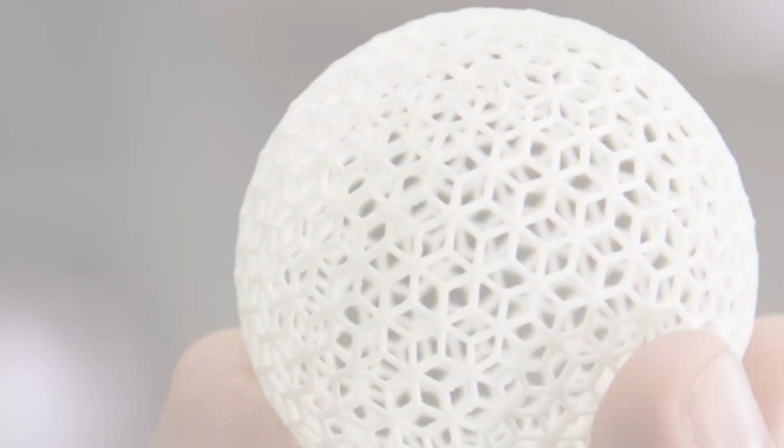It's 2020, an awaited year which was predicted as a revolutionary year. Indeed, it has happened so. In this pandemic situation of COVID-19, a technology which has emerged as a boon for mankind is 3D printing. In Italy, this technology came into rescue for hospitals when valves to reanimate medical devices were not available and traditional manufacturing ways were shut. Worldwide, an informal network of hobbyists and manufacturing firms are using 3D printers to make tens and thousands of T-pipes, face masks, shields, ventilators, and lots of other medical equipment and products which were needed but unavailable in market.

3D printing is definitely the future's technology and an essential part of Industry 4.0. Industry 4.0 is the fourth industrial revolution.

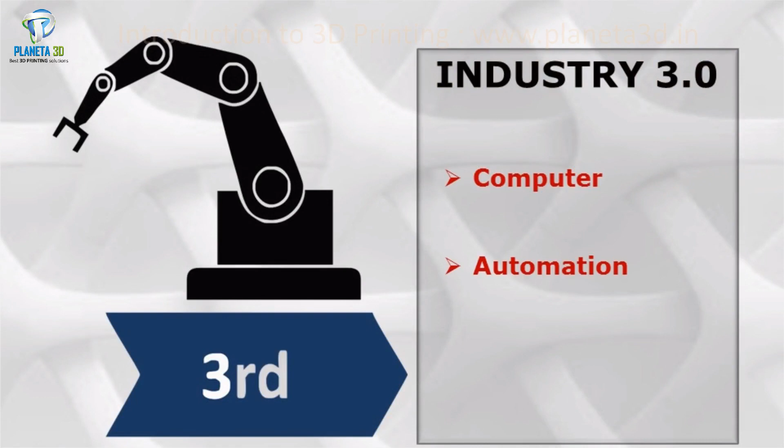What it is and why you should care: the fourth industrial revolution is the fourth time human beings started using advanced technology to solve problems. Humans first started using mechanism, water power, and steam power. Then secondly came mass production, assembly line, and electricity. Third was computer and automation. And fourth is 3D printing and cyber physical systems.

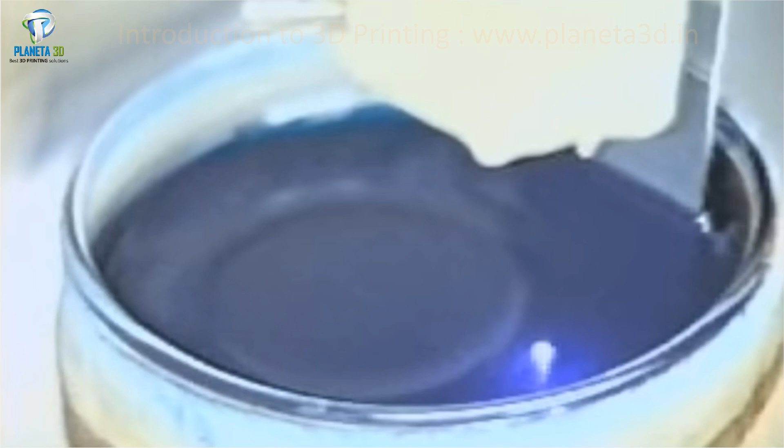People often wonder, are 3D printers too difficult to handle and operate? Well, in its time of origin, this technology did need only highly trained professionals to operate, because 3D printers were initially designed specifically for engineers, architects, surveyors, or other technical professions. Earlier, 3D printing technology seemed to be some science fiction that was difficult to understand and even more difficult to perform. But exploring its vast utility in every big and small field, towards the 21st century, experts have successfully made 3D printing a lot more simple, user-friendly, and easy to access.

3D printers are now available for common consumers at ease and at affordable price too. In this introductory course, I am sharing some basic information about this revolutionary technology which will definitely make you capable enough to get started with 3D printing.

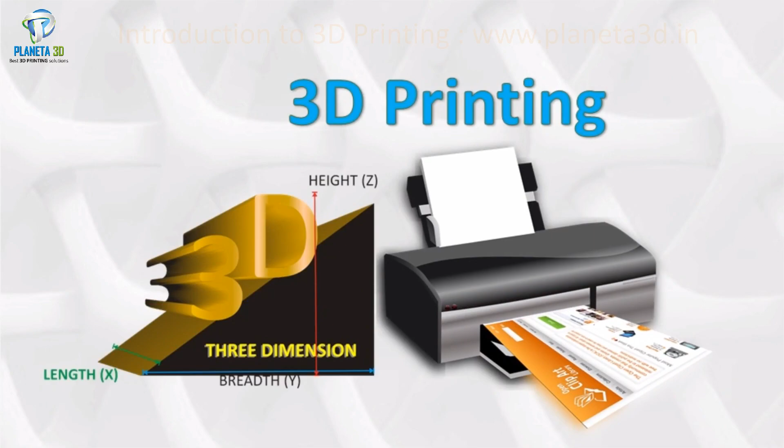Now what's printing? Printing is a process for reproducing text and images using a desired color, ink or any material using a machine. The printers used in offices and homes are 2D printers, two-dimensional, that is length and width. Now, combining both the concepts of 3D and printing, this new term 3D printing came into existence. First a CAD file is designed and then the print command is given to the machine. So this machine is called a printer that prints in 3 dimensions, and the process is called 3D printing.

Magic! This process is also known as the additive manufacturing process.

Earlier, products were manufactured either by subtractive manufacturing process or formative manufacturing process. Formative manufacturing typically forms material into desired shape through heat and pressure. The raw material used can be melted down and extruded under pressure into a mold, known as injection molding or die casting, or pressed and pulled into the desired shape, called stamping, vacuum forming, and forging. The design of formative tooling is also complex, with the need for mold features like sprues or runners to assist in the formation of parts. Parts produced through formative manufacturing also have design constraints like draft angles and uniform wall thickness to aid in the forming process.

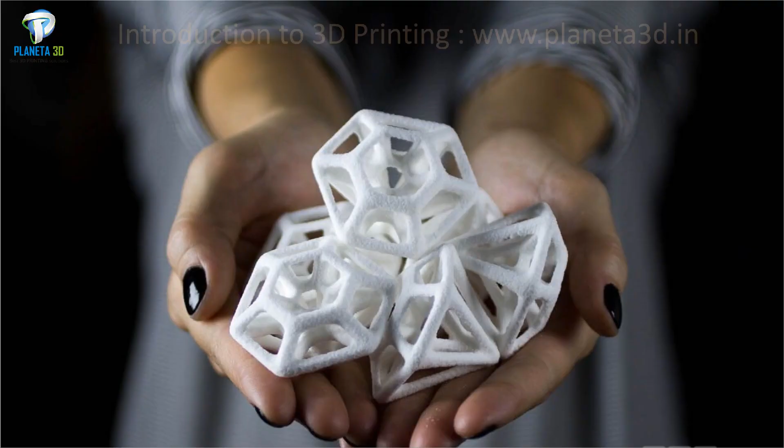Subtractive manufacturing typically forms material into desired shape via punching or CNC. In this process, from a block of material, the unwanted material is removed to obtain the shape of the desired object. Subtractive manufacturing is almost a wasteful production process, as a large amount of material is often removed to produce the final part, leaving a lot of waste. The biggest hurdle is that complex geometrical shapes are not at all possible.

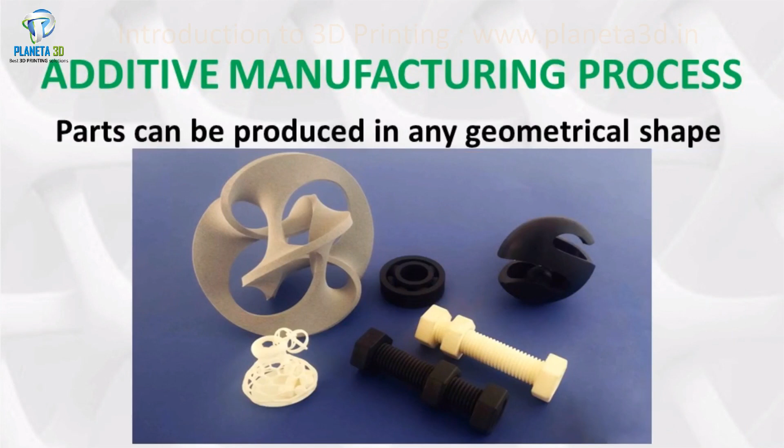All these hurdles in production make additive manufacturing technology very appealing to the industry, because it has potential to be precise, cost-effective and time-saving in terms of production. In additive manufacturing, layer by layer is added; each layer is cooled and combines with the lower layer to form the material into the desired shape. Instead of carving out shape from a large chunk of material, which is quite wasteful, production of 3D objects using a 3D printer could mean using just the required material to make a product. This mode of production is the method of creating an object from a digital design, so parts can be produced in almost any geometry, which is one of the core strengths of additive manufacturing.

3D printing does not rely on expensive tooling, with essentially low startup cost, and the biggest advantage includes rapid verification, development of prototypes, and even production of functional parts for end use. And that's not all. The most interesting part is that additive manufacturing can also be used to make mold, die, and punch, which are used in formative and subtractive manufacturing. Wow! I just love 3D printing technology.

Applications of 3D printing. 3D printing will disrupt every field it touches. In recent years, 3D printing technology has developed significantly and can now perform crucial roles in many mainstream applications.

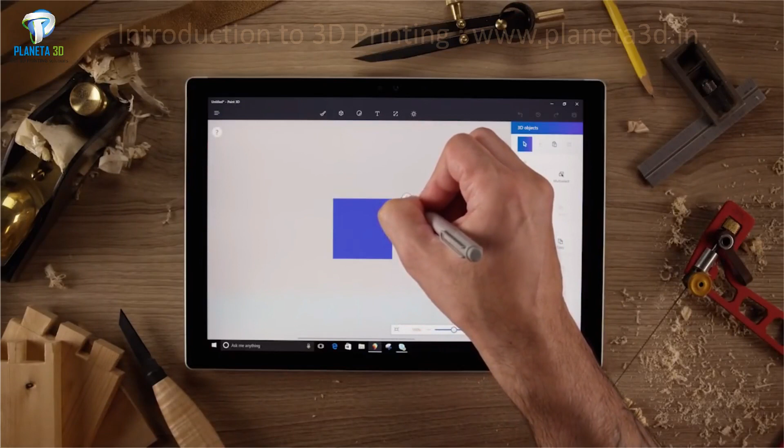There's a lot you can do with the primitive 3D shapes in Paint 3D, like this cube. Use the top rotation tool to adjust the angle of your object. The rotation tool on the right can be used to tip your model back and forth. Use the orbit tool on the bottom to spin your model around, and use the last tool on the left to move your model back and forth in space. Grab any edge of your selection and pull it in or out to adjust the depth of your shape. It's easy to use the adjustment tools in Paint 3D to turn basic shapes into something totally new.

Let's also have a demonstration of 3D modeling with Tinkercad.

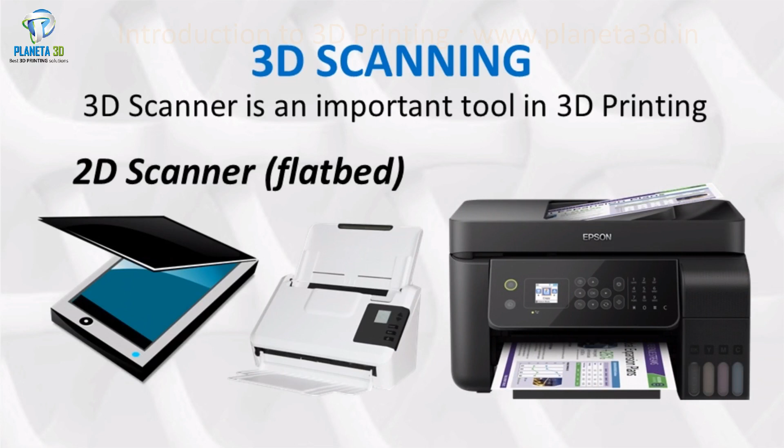3D scanning. 3D scanner is another important tool in 3D printing. For more understanding, let's compare it with a flatbed scanner, which is commonly used to scan documents and images. Scanned files can be used as a digital reference and preserved. Also, it can be used to make multiple copies from it. Scanned files are also very easy to send via internet or storage devices to others. In the same way, 3D scanner solves the purpose. It stores 3D properties of the scanned object that can be used when needed.

How does a 3D scanner work? Switch on and hold it. Move the scanner around the object. Save the digital replica file. Do some corrections or editing if needed and give the print command. The 3D printer does the rest. Let's see a demo of a beginner's level 3D scanner made by XYZ.

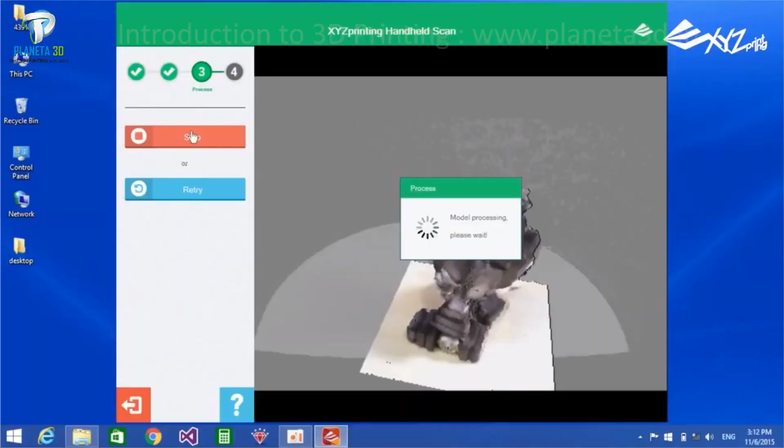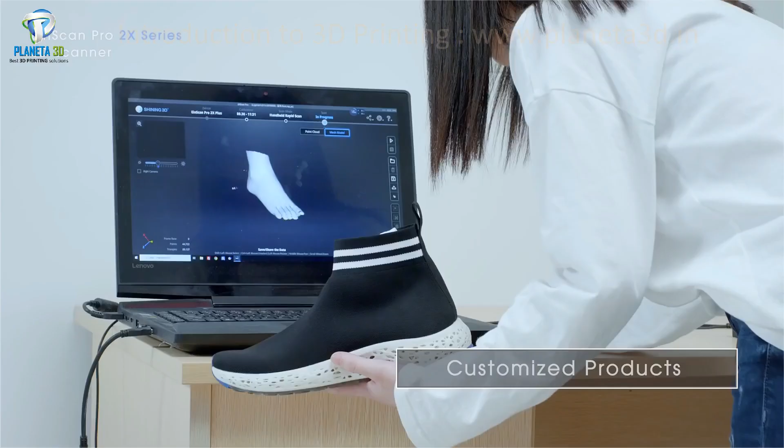There are different high-range 3D scanners for terrestrial scanning, for surveyors, and big turnkey projects.

STL and slicing. In order to 3D print a product, a CAD model must be converted into a format that a 3D printer is able to interpret. This begins by converting the CAD model into a stereolithography, that is STL file, also referred to as Standard Triangle Language File. OBJ or 3MF file formats are also compatible but are less frequently used. STL uses triangles, that is polygons, to describe the surface of an object, essentially simplifying the often complex CAD model. Most CAD programs are capable of exporting a model as an STL file.

Once an STL file has been generated, the file is then imported into a slicer program, which slices the design into horizontal layers that will be used to build up the object. The slicer program takes the STL file forward and converts it into a G-code. G-code is a numerical control programming language used in CAM to control automated machines like CNC machines and 3D printers.

The slicer program also allows the operator to define the 3D printer build parameters by specifying support location, layer height, and part orientation. The slicer programs are often proprietary to each brand of 3D printer, although there are some universal slicer programs like Cura, Netfabb, Simplify 3D, Slicer, etc.

If you are a designer, you only need to provide the 3D printer operator with an STL file. The operator will then set the desired parameters for the print and produce the G-code file themselves.

Types of 3D printing processes. In 2015, to standardize and define different methods of 3D printing, the ISO ASTM 52900 standard was formed. Seven types of 3D printing processes were categorized, which are as follows: material extrusion, vat polymerization, powder bed fusion, material jetting, binder jetting, direct energy deposition, sheet lamination.

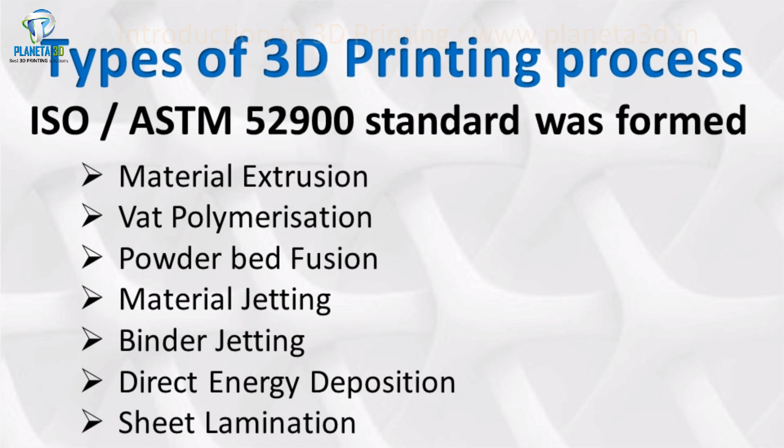Let's discuss these technologies associated with the processes and also description of the processes.

Material extrusion process: here, material is selectively extruded through the nozzle or an orifice. Fused filament fabrication (FFF) technology, commonly also known as fused deposition modeling (FDM), operates under this process. FDM is a term trademarked by Stratasys. This technology is more commonly spread and also consumer friendly.

The material comes in the form of a string of solid thermoplastic material known as filament. Filament is pushed through a heated nozzle and gets melted. In melted form, it's extruded on the build bed in a G-code programmed manner. Filament gets cooled, solidifies, and forms a solid shape. Once a layer is complete, the build platform moves down and the process repeats, building up the part layer by layer.

Supports are required for structures which have overhangs less than 45 degrees and bridges longer than 20 mm.

FFF technology is used in both low-cost desktop 3D printers as well as high-end industrial machines. Low-cost desktop FFF printers are technically similar to their high-end industrial counterparts, but their capabilities differ. Industrial printers use a tightly controlled environment and are able to automatically adjust printer settings to suit the print material.

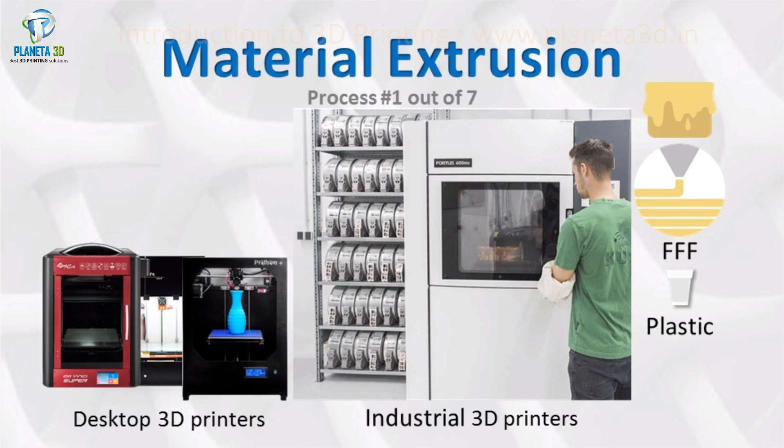Most industrial machines also use dual extrusion, allowing support structures to be printed in a dissolvable material. Because of the controlled build environment, industrial machines generally produce parts of greater accuracy with a high level of repeatability. The build volume of industrial machines is also larger, allowing bigger parts or a greater number of parts to be produced in a single build.

For this reason, industrial machines are being utilized for low to medium rate production runs. Desktop FFF machines offer a low-cost and rapid method of 3D printing. The accuracy of desktop machines is generally adequate for most applications.

As hardware, materials, and software continuously improve, the gap between industrial and desktop FFF is decreasing. Apart from the increased build chamber offered by industrial machines, modern desktop printers are highly accurate machines offering dual head extrusion for dissolvable support materials or multi-material prints, bringing parts of industrial quality to the desktop.

In addition, desktop 3D printers allow more control over the print parameters compared to industrial machines, making them ideal for prototyping.

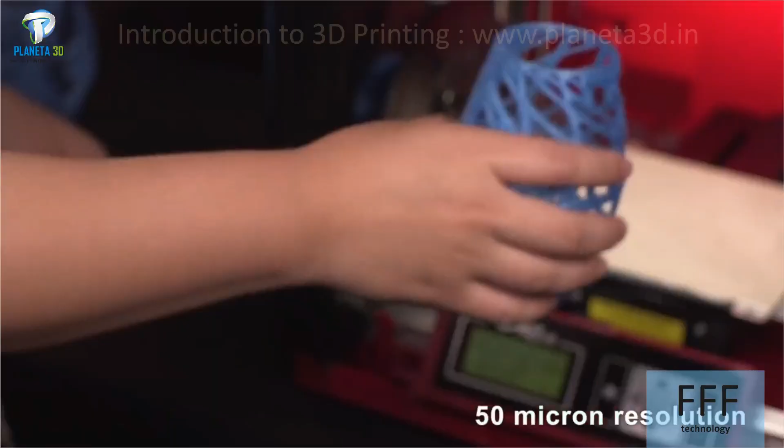Nowadays, even DIY kits are being introduced, which are available at very cheap rates, but their performance can't be compared to desktop 3D printers. DIY 3D printers have an open body structure, so extra precautions are required to operate, like exposure to dust, harmful effects from use of certain materials, and also sometimes not at all safe for children.

Filaments come in different materials like ABS, PLA, nylon, PETG, TPU, PEI. ABS and PLA are most commonly used materials. Preferably, Planeta 3D promotes PLA because it's eco-friendly and not harmful like ABS.

Special kinds of PLA filaments are also developed, which are made from fruit and vegetable extracts, specially for educational purposes, keeping in mind the safety of children. Previously, PLA filaments didn't have strength, but now new PLA Plus materials have equal strength to ABS.

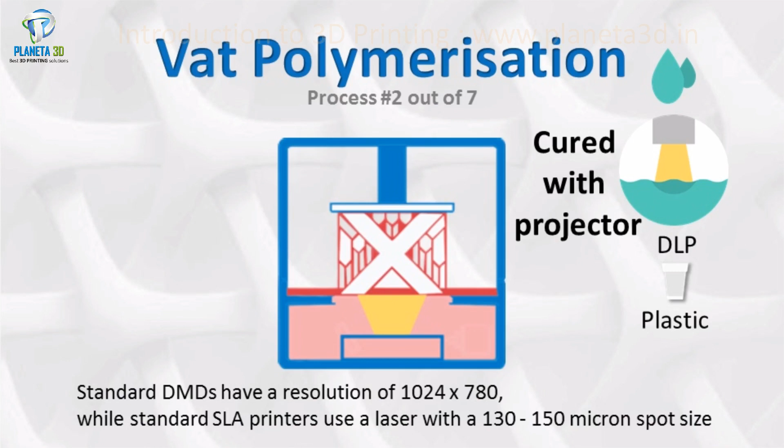VAT polymerization machines are able to produce parts in two different orientations: bottom up or top down. SLA and DLP printers come in both configurations, with the design depending on the manufacturer. Both configurations have their respective advantages and disadvantages.

VAT polymerization 3D printers are also available in grades of industrial and desktop 3D printers and DIY kits. As with FFF, the main difference between different grade vat polymerization 3D printers is the build environment. Industrial machines use a regulated environment and higher DMD resolution, and are therefore able to produce more accurate parts and utilize a large range of engineering materials.

Desktop printers can produce parts to an accuracy of 100 to 250 microns, while industrial machines are capable of 10 to 30 microns. Higher accuracies generally also lead to a better surface finish. DIY printers are very cheap and serve the purpose of just learning or getting introduced to the technology.

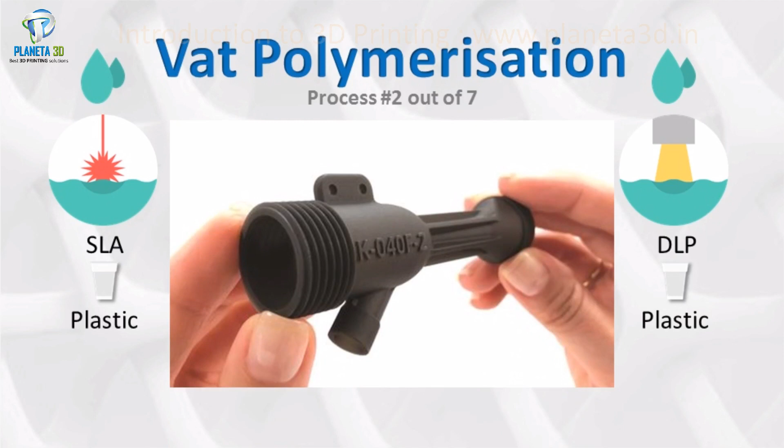Vat polymerization parts are most suitable for visual applications and prototyping, where a smooth surface finish and high accuracy are desirable. Some of the most common applications of vat polymerization are injection mold-like prototypes, jewelry, investment casting, dental applications, and hearing aids.

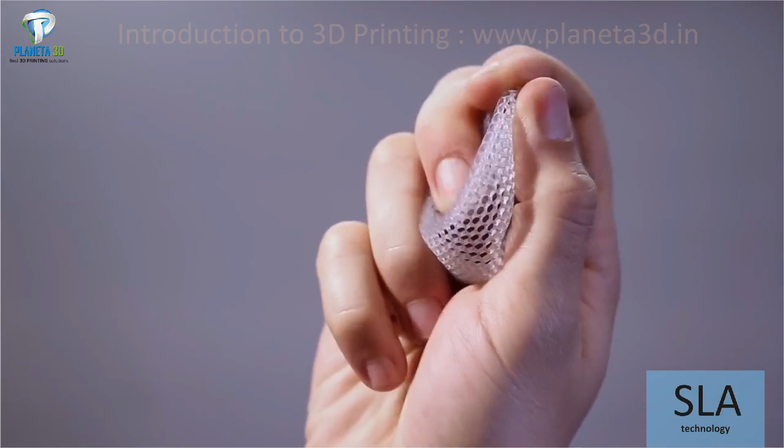In the vat polymerization process, a new technology, continuous digital light processing (CDLP), also known as continuous liquid interface production or CLIP, is invented. CDLP produces parts exactly the same way as DLP. However, it relies on the continuous motion of the build plate in the Z direction, upwards.

This allows faster build times as the printer is not required to stop and separate the part from the build plate after each layer is produced. The resin is cured using a combination of LED and oxygen.

Powder bed fusion process (PBF), in which thermal energy selectively fuses regions of a powder bed. Selective laser sintering (SLS), direct metal laser sintering (DMLS), selective laser melting (SLM), electron beam melting (EBM), and multi-jet fusion (MJF) are technologies that operate under this process.

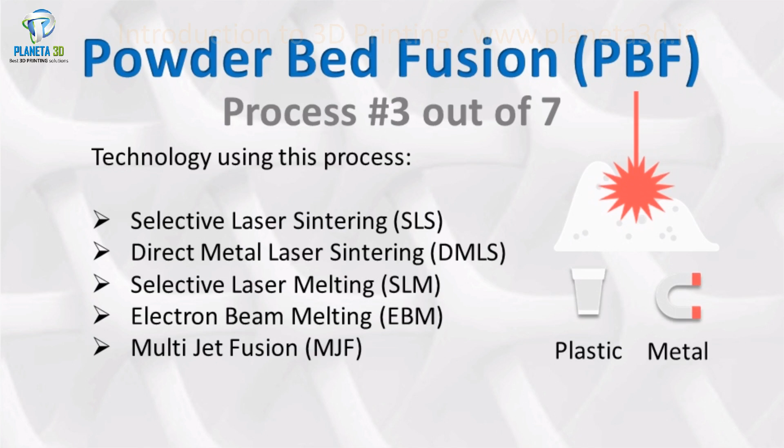Selective laser sintering (SLS) creates parts layer by layer, producing solid plastic parts using a laser to sinter thin layers of powdered material one layer at a time. The process begins by spreading an initial layer of powder over the build platform. The cross section of the part is scanned and sintered by the laser, solidifying it.

The build platform then drops down one layer thickness and a new layer of powder is applied. The process repeats until a solid part is produced. The result is a component completely encased in unsintered powder. The part is removed from the powder, cleaned, and then it is ready for use or further post-processing.

SLS is best suited for producing strong functional parts with complex geometries. This, coupled with the isotropic nature and high level of accuracy, sees the technology often adopted for the production of end-use parts. The other big advantage of the SLS process is that parts do not require any support material. This means support does not need to be removed after printing, and also results in a consistent overall surface finish, as there is no negative effect from support being in contact with the build surface.

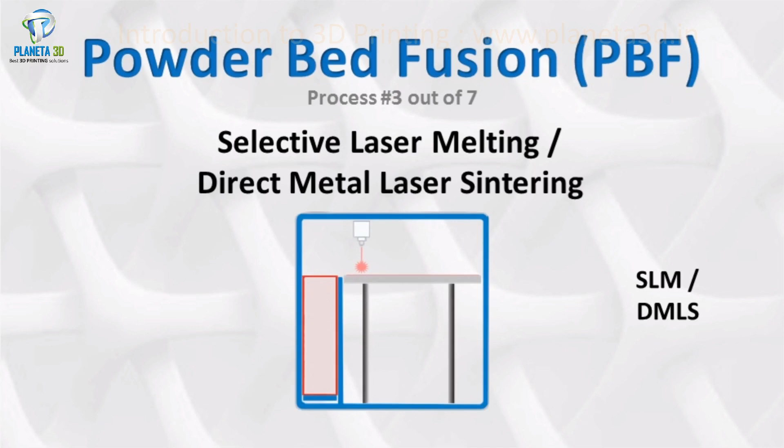Selective laser melting (SLM) and direct metal laser sintering (DMLS) both produce parts in a similar method to SLS. The main difference is that SLM and DMLS are used in the production of metal parts.

SLM achieves a full melt of the powder, while DMLS heats the powder to near melting temperatures until the particles chemically fuse together. DMLS only works with alloys like nickel alloys, Ti64, etc., while SLM can use single component metals such as aluminium.

Unlike SLS, SLM and DMLS require support structures to compensate for the high residual stresses generated during the build process. This helps to limit the likelihood of warping and distortion. DMLS is the most well-established metal additive manufacturing process with the largest installed base.

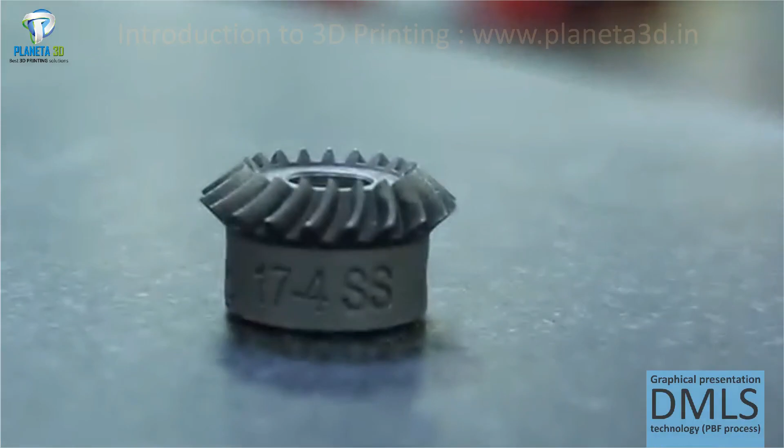Electron beam melting (EBM) uses a high energy beam rather than a laser to induce fusion between the particles of a metal powder. A focused electron beam scans across a thin layer of powder, causing localized melting and solidification over a specific cross-sectional area.

EBM produces less residual stress in parts, resulting in less distortion and less need for anchors and support structures. Moreover, EBM uses less energy and can produce layers at a faster rate than SLM and DMLS. But the minimum feature size, powder particle size, layer thickness, and surface finish are typically of lower quality.

EBM also requires the parts to be produced in a vacuum, and the process can only be used with conductive materials.

Multi-jet fusion (MJF) is a new technology invented by HP. MJF 3D printers work in a similar method to other powder bed fusion technologies, with one extra step added to the process: a detailing agent. MJF is a combination of SLS and material jetting technologies.

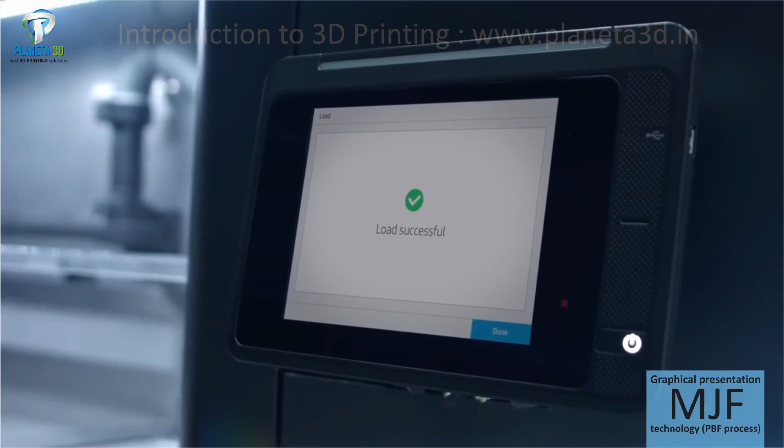For materials loading, the build unit is inserted into the HP Jet Fusion 3D processing station. Pre-packed HP materials cartridges are installed and quantity and mixing options selected. The materials are transferred to the build unit in a clean and automated process before it is slotted into the printer so production can start.

Pre-print and in-printer checks enable predictable quality output. HP's multi-jet fusion technology delivers extreme dimensional accuracy and optimal mechanical properties faster. And thanks to HP's unique multi-agent printing process, you have voxel by voxel control over each part.

The material is contained within the HP Jet Fusion 3D build unit at all times, meaning the printer can easily switch between a range of different materials. The material is raised from inside the build unit and spread evenly across the build platform, where the fusing process occurs. The build platform is then lowered by precise mechanisms, which help ensure a high degree of dimensional accuracy.

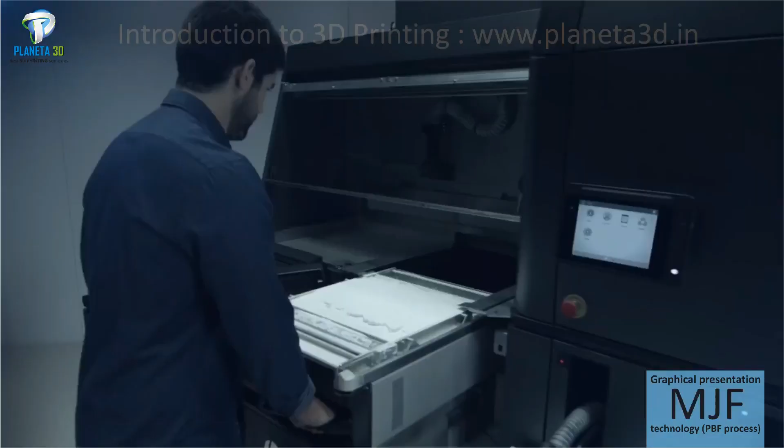At any point during the printing process, you can monitor job status in the command center. The build unit is removed from the printer and taken to the processing station, and the second build unit is installed, so you don't have to stop production.

The HP Jet Fusion 3D processing station allows for cooling, unpacking, and mixing via a semi-automatic process, which helps reduce labor costs. Fast cooling speeds up the post-print process, and the powder is contained entirely within the processing unit, ensuring cleaner unpacking and materials reuse and mixing.

During unpacking, a laminar airflow ensures all unused material is stored, ready to be recycled for the next job. Any remaining unused material can be recovered manually to provide the highest possible reusability rates. Once cooled and unpacked, the parts are ready for processing in a bead blast cabinet before any final finishes are applied.

The unused powder is recycled and mixed with fresh material, and once the build unit is filled, the processing station is ready for the next job.

The HP Jet Fusion 3D printing solution offers the possibility to print using different materials. The HP Jet Fusion 3D external tank provides the option to extract recycled material from the processing station, so it can be replaced with a different material.

You can rely on HP's world-class services and support to maximize uptime and productivity. HP Jet Fusion 3D printing: start producing more functional parts within the same day, up to 10 times faster, and at the lowest cost.

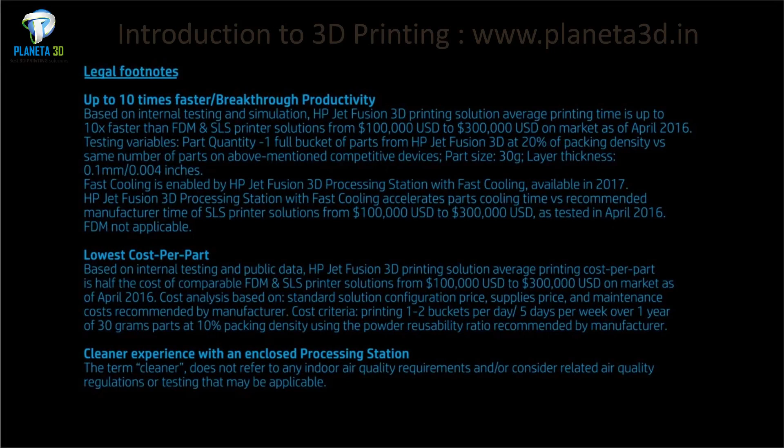Materials used in PBF are nylon, alumide, PEEK, TPU, aluminium, titanium, stainless steel, nickel alloys, cobalt chrome, carbon fiber filled nylon.

Material jetting process, in which droplets of material are selectively deposited and cured on a build plate. Material jetting MJ, drop on demand DOD, and nanoparticle jetting NPJ technologies operate under this process. Material jetting MJ works much like a standard inkjet printer.

However, instead of printing a single layer of ink, many layers are built upon one another to create a solid part. The print head jets hundreds of tiny droplets of photopolymer and then solidifies them through a UV light. After a layer has been deposited and cured, the build platform drops down one layer thickness, and the process is repeated to build up a 3D part.

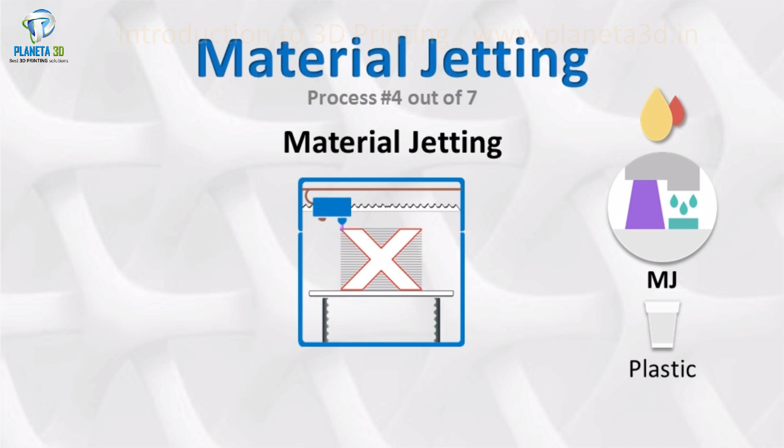Material jetting process requires support, and this is often printed simultaneously during the build from a dissolvable material that is easily removed during post-processing. Drop on demand DOD printers have two print jets, one to deposit the build materials, typically a wax-like material, and another for dissolvable support material.

Similar to other AM techniques, DOD printers follow a set path and jet material in a single moving point to generate a cross-sectional area of a component layer by layer, which is unlike material jetting that deposits material in a line. These machines also employ a fly cutter that skims the build area after each layer to ensure a perfectly flat surface before printing the next layer. DOD technology is typically used to produce wax-like patterns for lost wax casting, investment casting, and mold making applications.

Nanoparticle jetting NPJ uses a liquid which contains metal nanoparticles or support nanoparticles loaded into the printer as a cartridge and jetted onto the build tray in extremely thin layers of droplets. High temperatures inside the build envelope cause the liquid to evaporate, leaving behind metal parts.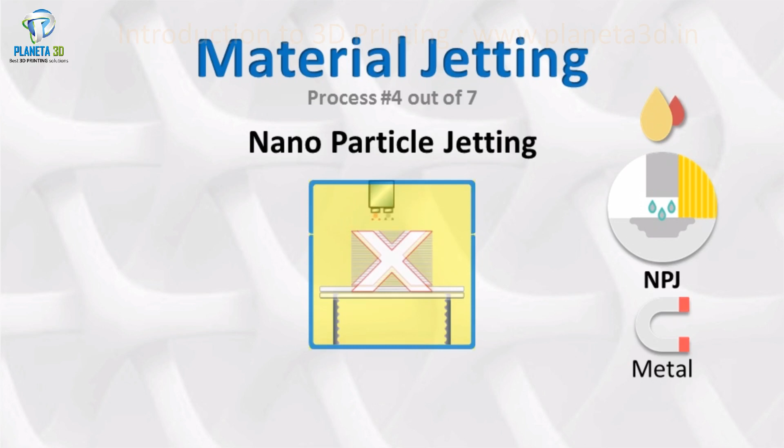Material jetting process is ideal for realistic prototypes, providing excellent details, high accuracy, and smooth surface finish. Material jetting allows a designer to print in multiple colors and multiple materials in a single print. The main drawbacks of material jetting technology are the high cost and the brittle mechanical properties of the UV activated photopolymers.

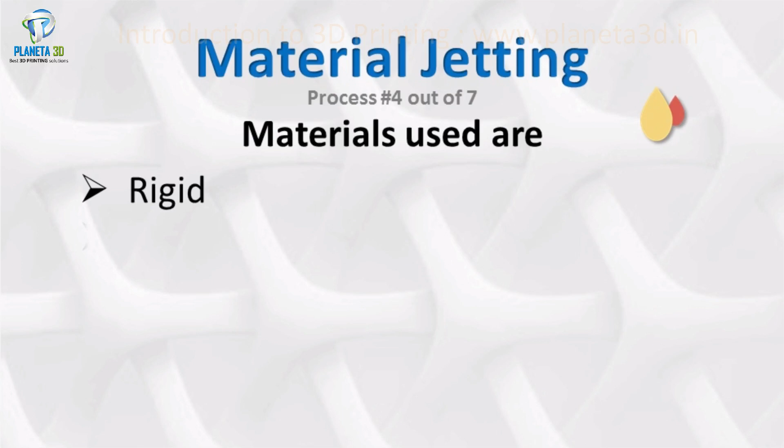Materials used in material jetting are rigid, transparent, rubber-like, ABS-like, stainless steel, ceramics, wax, multi-material and multicolor printing.

Binder jetting process, in which a liquid bonding agent selectively binds regions of a powder bed. Binder jetting prints in a similar fashion to SLS, with the requirement of an initial layer of powder on the build platform. Unlike SLS, which uses a laser to sinter powder, binder jetting moves a print head over the powder surface, depositing binder droplets, typically 80 microns in diameter, that bind the powder particles together to produce each layer of the part. Once a layer has been printed, the powder bed is lowered and a new layer of powder is spread over the recently printed layer.

This process is repeated until a solid part is generated. The part is then left in the powder to cure and gain strength. After this, the part is removed from the powder bed and the unbound powder is removed via compressed air. After printing, the parts are in a green state and require additional post-processing before they are ready to use. Often, an infiltrant is added to improve the mechanical properties of the parts.

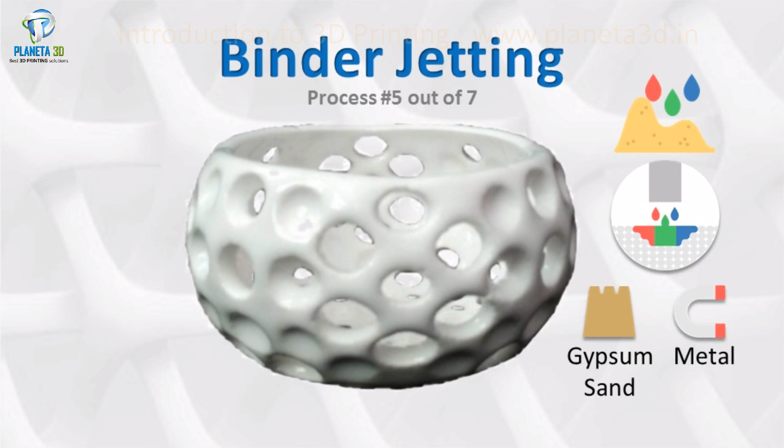Ceramic-based binder jetting is ideally suited for applications that showcase aesthetics and forms, architectural models, packaging, ergonomic verifications, etc. It is not suitable though for functional prototypes, as the parts are very brittle. Ceramic-based binder jetting can also be used to create molds for sand casting. Metal binder jetting parts can also be used as functional components and are more cost-effective than SLM or DMLS metal parts, but have poorer mechanical properties.

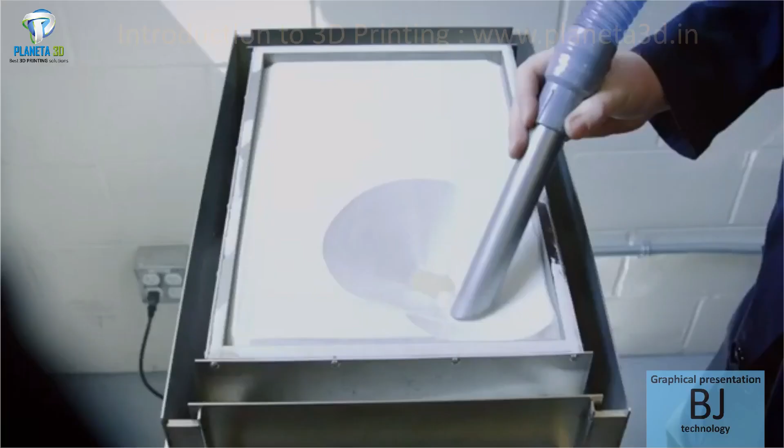Materials used in binder jetting are silica sand, PMMA particle material, gypsum, stainless steel, ceramics, cobalt chrome, tungsten carbide.

Direct energy deposition DED process, in which focused thermal energy is used to fuse materials by melting as they are deposited. It is predominantly used with metal powders or wire and is often referred to as metal deposition. Laser engineered net shape LENS, and electron beam additive manufacture EBAM are the two technologies using the DED process.

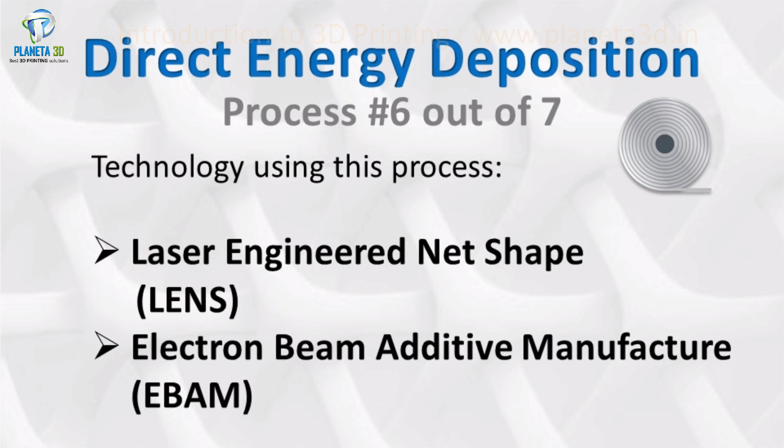Laser Engineered Net Shape LENS utilizes a deposition head which consists of a laser head, powder dispensing nozzles, and inert gas tubing to melt powder as it is ejected from the powder dispensing nozzles to build a solid part layer by layer. The laser creates a melt pool on the build area and powder is sprayed into the pool, where it is melted and then solidified. The substrate is typically a flat metal plate or an existing part that material is added on.

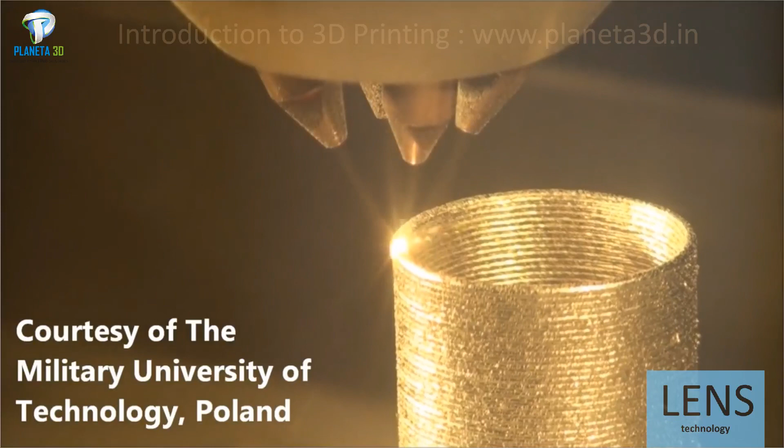Electron beam additive manufacture EBAM is used to create metal parts using metal powder or wire welded together using an electron beam as the heat source. Producing parts in a similar fashion to LENS, electron beams are more efficient than lasers and operate under a vacuum, with the technology originally being designed for use in space.

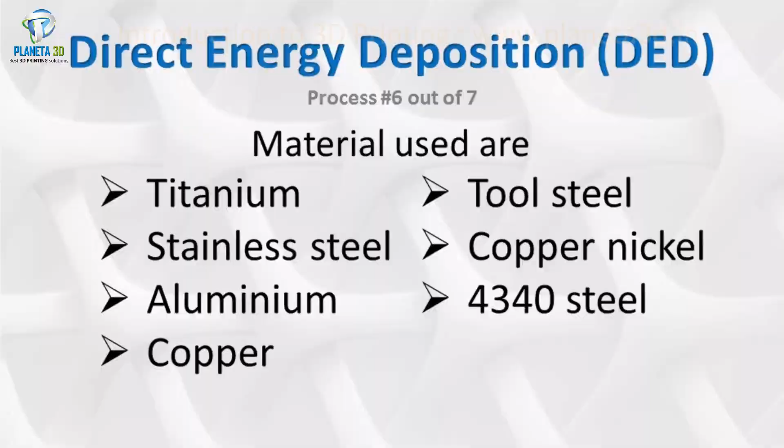Sheet lamination is a process in which sheets of materials are bonded to form a part. Ultrasonic additive manufacturing (UAM) and laminated object manufacturing (LOM) are technologies that operate under this process. This technique is mainly used to produce colored objects in high detailed resolution. As build material, thin layered materials like aluminium foil or paper-based filaments are cut into appropriately shaped layers, often by lasers or a very sharp blade.

Layers are coated with adhesive and successively glued together layer by layer, similar to other 3D printing technologies. The precision of the result depends mostly on the thickness of the layered materials used. Objects printed with this technique may be additionally modified by machining or drilling after the printing process is completed.

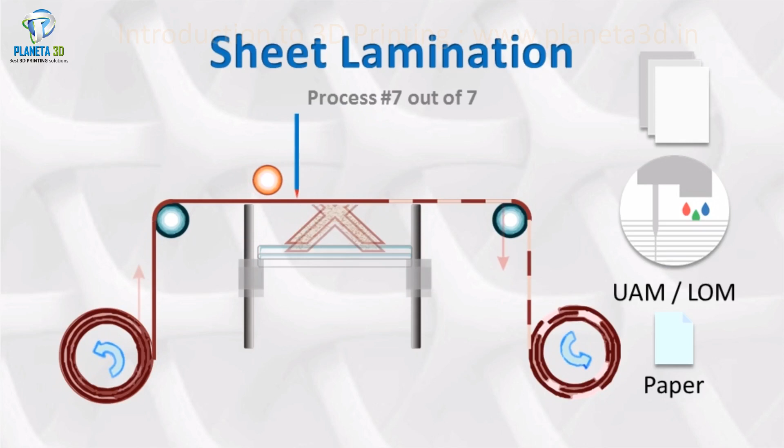Sheet lamination is a low temperature process used for making models for display. The process is quite useful for making visual models speedily at low cost. However, it is not suitable for making structural or functional models. That is why, even for prototyping, sheet lamination has limited use. It is generally used for making dummy models for demonstration purposes only, so this process is not as frequently used worldwide compared to others.

With this, let me summarize the session. In this session, you got introduced to Industry 4.0, what is 3D printing, 3D designing, 3D scanning, and above all, 7 different 3D printing processes and 18 different technologies based on each individual process.

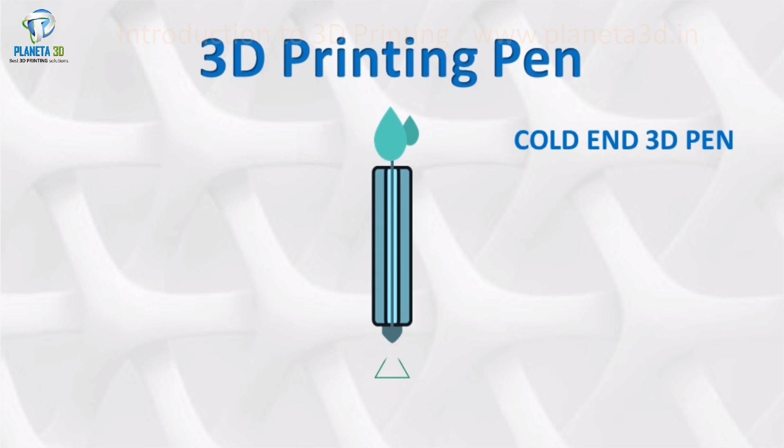A 3D pen is a serious tool for architects and professionals in product development teams to have a 3D sketchwork. On the other hand, it's an effective tool when used for crafts, drawing, and creative arts. A 3D pen is a must for practical learning experience when it comes to the classroom for students.